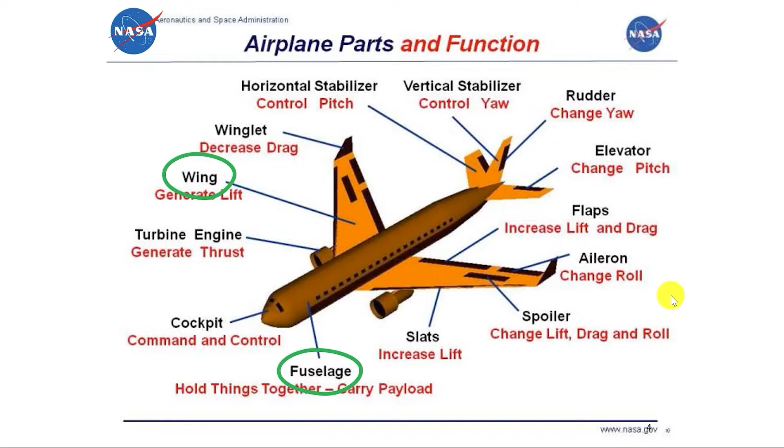Okay, so wings are basically designed in different shapes and forms. Today, we're going to be only concentrating on one form of them, which is the rectangular wing. I'll go and show you a schematic very soon. But from every other part that the aircraft has, today we're going to be only concentrating on the wing, which is going to be attached to the fuselage, where it's carrying passengers, payload, even sometimes fuel or cargo. So that's what we're going to be concentrating on.

There are different phases of flight that an aircraft or airplane is going to go through. Let's consider a commercial aircraft. It goes through taxiing, then takeoff, cruise, descent, and then landing. So for long-haul airplanes, the main phase is going to be the cruise phase. This is where they're going to be climbing to a certain altitude, keeping that altitude, and cruising to the destination. So for an airplane to be able to move from point A to B at a certain altitude, all the forces have to be in balance, like what we're showing here.

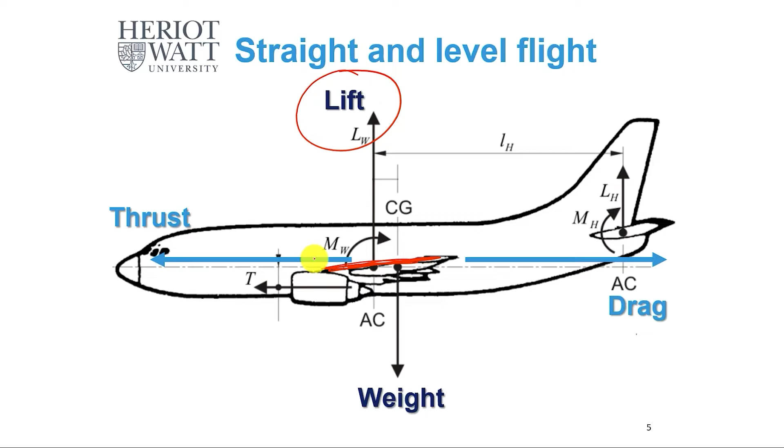So, as I said, there are different shapes of wings that we can generate lift with, but the main lift, as I'm highlighting here, is actually generated from the wing. With the latest technologies, however, in some of the recent aircraft, the fuselage is also contributing to the lift generation. But the majority of the lift that's going to be generated is from the wings themselves. Okay, so we are only going to be concentrating on wings today.

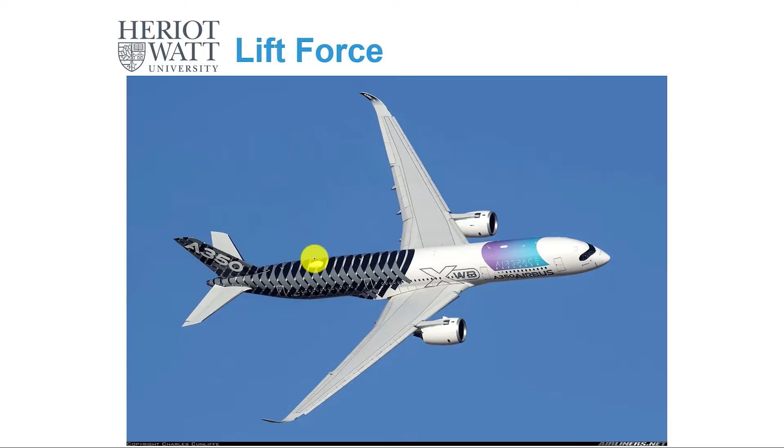So look at this Airbus A350. This was taken with a friend at the recent Dubai Air Show, so it's actually banking. What we want to do quickly in this slide is to understand what lift force generation is going to be dependent on. So depending on where your airplane is flying, whether it's sea level or a certain altitude, 30,000 feet, for example, the pressure, temperature, and more importantly, density of the air varies.

So as the altitude changes, lift force is going to be varying as well, because the amount of air molecules in the air is going to be different. So at higher altitude, less air we have, so less interaction between the molecules and the surface.

Okay, so this is definitely going to be affecting. The other thing which is affecting the lift is the wing area. So we're talking about aerodynamics. It's the interaction between the flow and the solid surface, in this case the wing. So the larger the area, the more interaction we're going to have. And if the shape is right, you're going to be generating more lift. So the larger wing area of your airplane is going to be giving us more lift. So lift is proportional to this area.

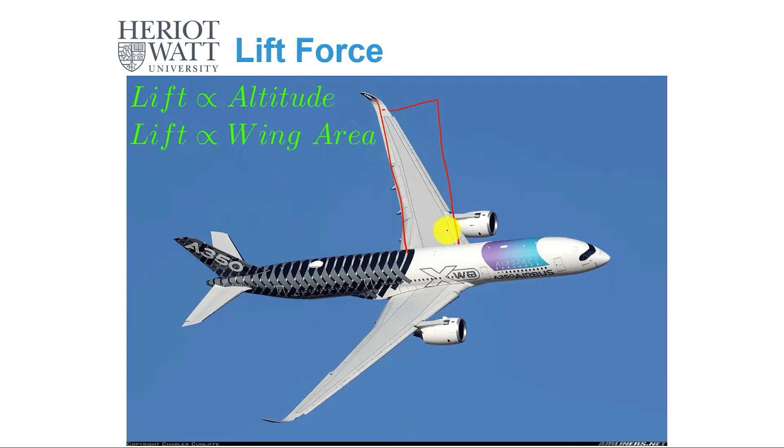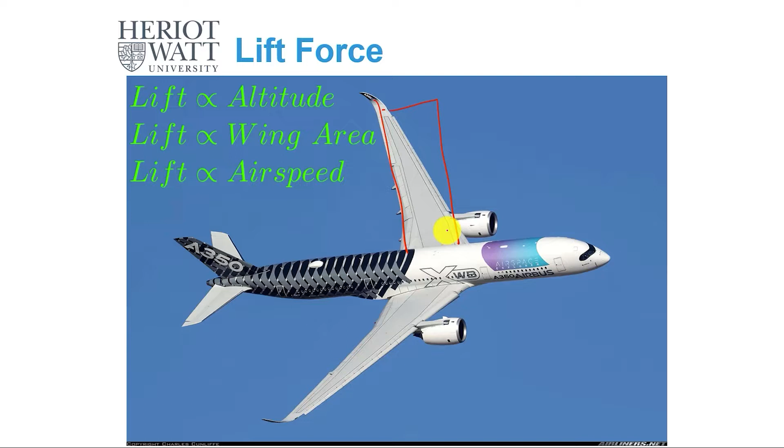The other parameter is airspeed. So the lift force is also proportional to airspeed. Okay, it's not linear, but it's proportional to the airspeed. So the faster the speed, the more lift is going to be generated. The last but not least is the actual characteristic of the wing itself, and that's what we're going to be concentrating on. Okay, so the characteristics of the wing, which are basically the profiles of the wing, like the one that you can see here, are basically determining how much lift is going to be produced. Okay.

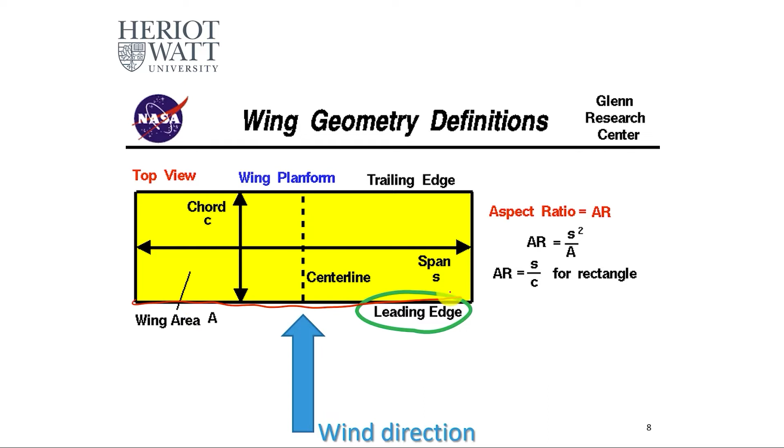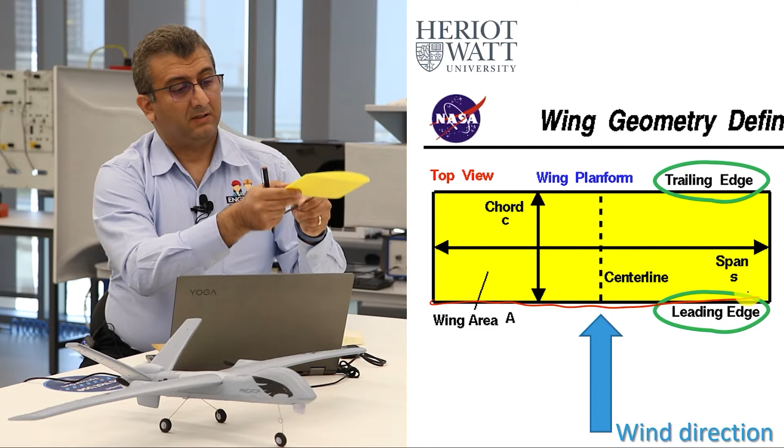So, as I said, today we are looking at a rectangular wing. Looking at this image, if the wind direction is going to be from the bottom to the top of the slide, this line here is going to be called the leading edge. This is basically the part that first sees the flow, and then we're going to have the aft part, which is called the trailing edge, and that's where the airfoil finishes. The distance between the leading edge and trailing edge

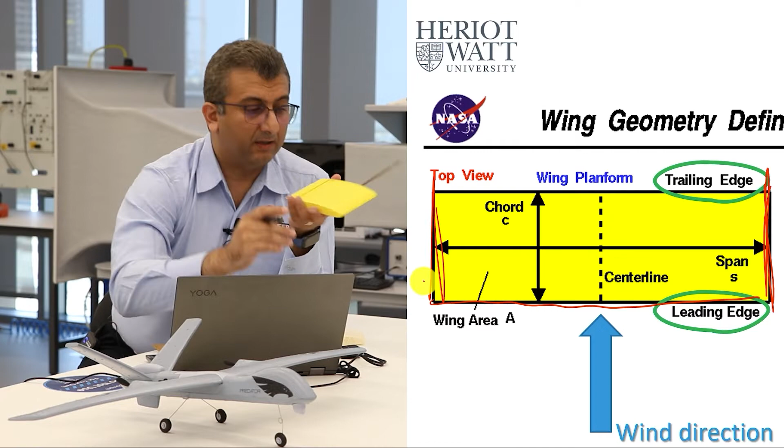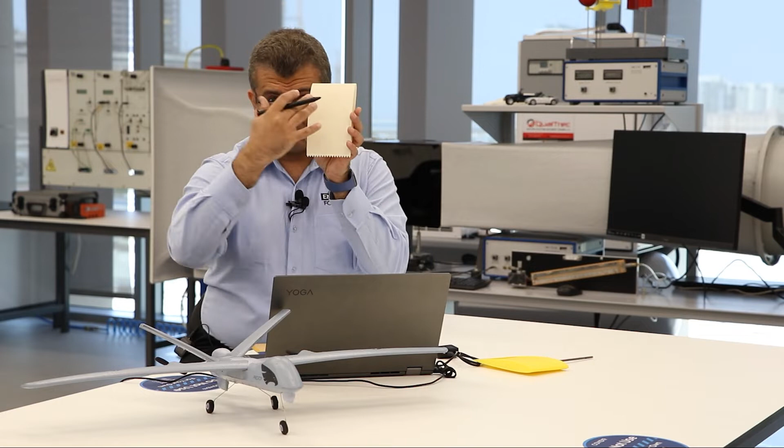is called chord. And the distance between the two sides, like what we have here, or these two sides, is called span. Like the aircraft model we have, it can have a long span, or like the airfoil we have, which has just been designed for testing, you're going to have a shorter span. So span can vary. Okay, and obviously this section is going to be the wing area. So if you look from the top, this is exactly the direction that you're looking at through the camera. This is going to be the wing area. That's going to be very important for us, as we said. Okay, so

in theory, and in fact that was the type of airfoil that a very long time ago was first produced, if you're going to have an airfoil, which is basically a cross section of the wing, so if I cut the wing at a certain point, the shape that you'll see from this side is called an airfoil. It's a teardrop sort of geometry. Then if the center line, which is basically running through here, divides your airfoil into two equal parts of upper and lower section, this airfoil is going to be called a symmetric airfoil.

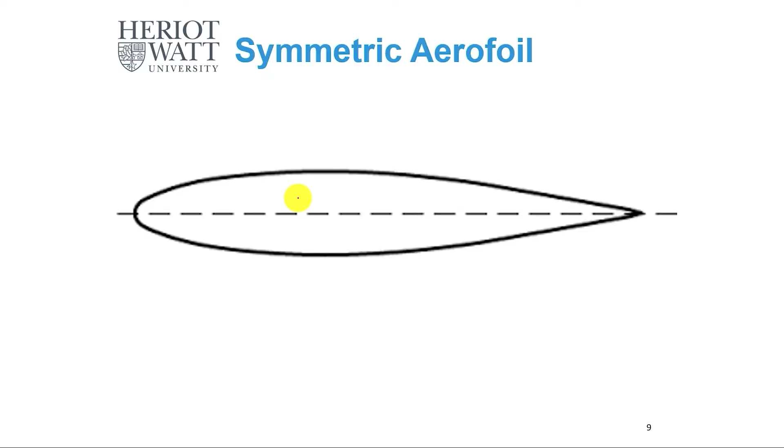With a symmetric airfoil, if you place it into the air, either move the airfoil or run the flow over it, since there's symmetry with respect to the horizontal axis, the force that's going to be generated at the top is going to be equal to what's at the bottom if you're holding your airfoil horizontally. It means there's not going to be any angle between the line connecting your leading edge to the trailing edge, which is your chord, like what I'm showing in this slide here. And hence, these two forces are balancing each other, so no lift is going to be produced.

So what do we do to generate lift for symmetric airfoils? We change the angle. So we change the angle of the chord with respect to the horizon, or with respect to where the flow is coming from. And that angle is called angle of attack, where the higher the angle, the more lift is going to be generated from the top. It's because the projected area of the upper surface is going to be longer than the lower. Flow travels faster at the top, hence the pressure gets smaller. With less pressure on the top than the lower, there's going to be an upward lift generated. Okay, so with the symmetric airfoil, the only way we can generate lift is by adjusting or changing the angle.

So look at this slide. Top left shows a numerical simulation where the lift is generated. The bottom right is actually a graph which soon you're going to be generating as well. It's the lift force as a function of the angle of attack.

So the higher the angle of attack, more lift is going to be generated, but the flow around the airfoil is going to be becoming more complex, and you're going to start seeing separation of the flow. You're going to see turbulences, eddies, vortices, all of this sort of messy flows like what you see in blue regions in this simulation,

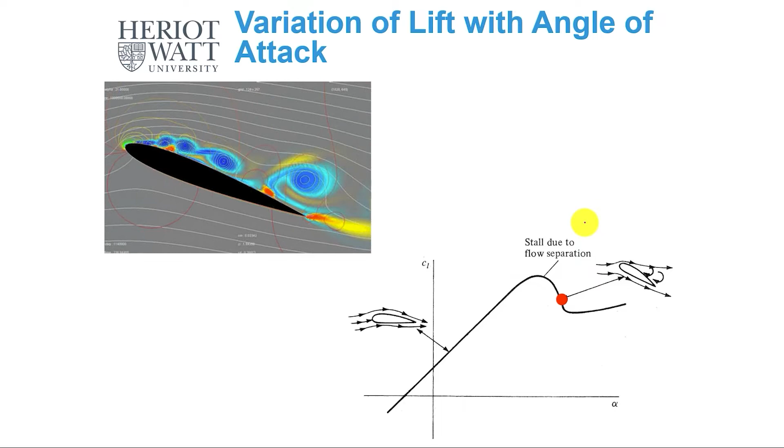that will at some point stop increasing the lift. So from that point onwards, no matter how much more you increase the angle, since there's not going to be any flow attached to the surface, it's going to be separated. This upward lift is not going to be sufficient. The weight will dominate and your aircraft will sink, basically. So this phenomenon is called stall. And you would see in this graph the peak is where the stall is actually happening and the separation is going on.

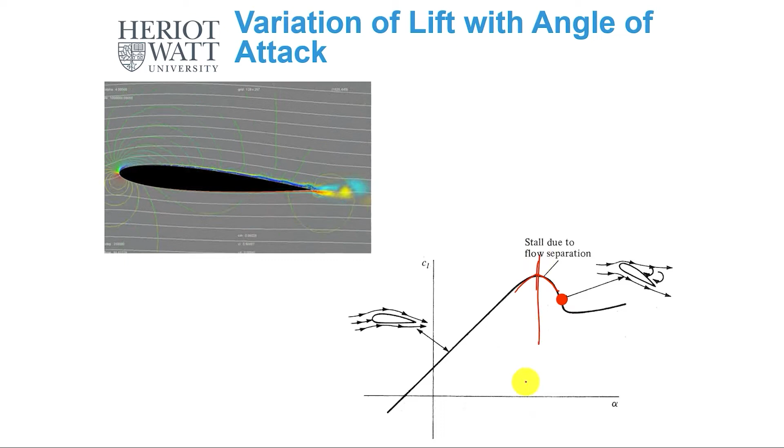So the question would be, what are the other ways that we can generate lift? One of the common ways is to adjust the geometry of the wing itself. So we create the curvature that, by adjusting the angle, we give ourselves. So looking at these graphs, what basically we're saying is we bring asymmetry into our geometry. So basically we'll curve the chord line, if you like. So we change the balance of the area between the upper and lower section when the chord runs through the leading edge and the trailing edge.

So the asymmetry and the curve is called camber. Okay, this is called camber, and obviously you can have different curvatures to be able to generate different lifts. So one of the main parameters in airfoil design or wing design is to adjust the camber, and that's what we're going to be actually doing today. Today one of the tasks we're going to be following is adjusting the camber to be able to produce the amount of lift that's required to hold an airplane in the air, basically.

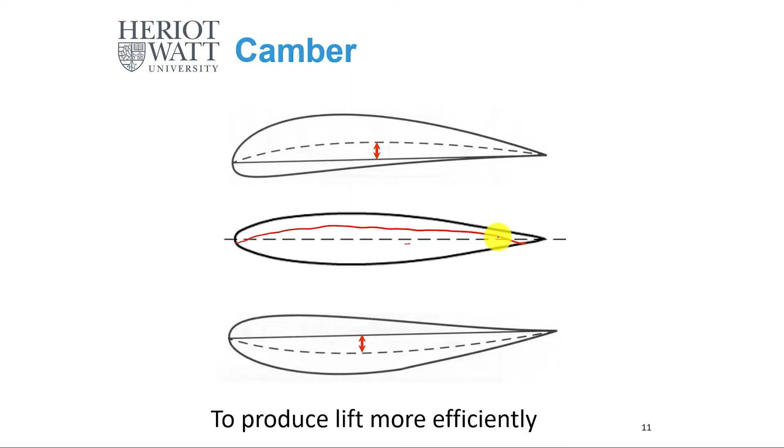Okay, so the other terminology that we are going to be using is the thickness. We talked about camber; this is going to be called thickness. So the distance between the upper and lower surfaces is called thickness of the airfoil. And obviously it varies, but there's going to be a point where you get a maximum for the thickness, and that's normally what we define, and that's a percentage of the chord. So if the chord is from 0 to 1, depending on the design of the airfoil, we can say the maximum thickness is going to be, let's say, 25% or 0.25 of the chord, for example. Okay.

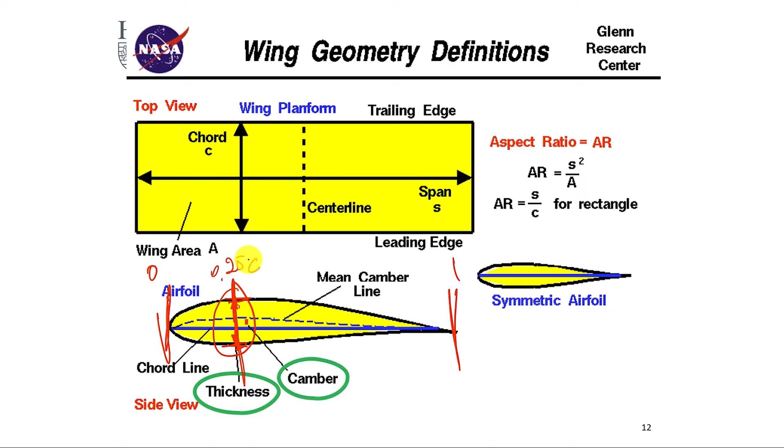So just to summarize the terminologies that we have learned: the lift force, which is generated by the wings; the span, the distance between the wingtips; chord, the distance between the leading edge and the trailing edge. The airfoil, which is basically the cut two-dimensional section of your wing. And in real wings, the actual profile can vary, and this is basically the secret of the companies. And then we talked about the camber, the asymmetry between the upper and lower surfaces, and the thickness, which is the distance between the upper and the lower surface at a certain location along the chord of the airfoil.

Now let's look at the tool. It's been designed by NASA. It's called FoilSim. It's a simulation tool, and it's used only for educational purposes. We can't use it for any real projects. So please note that, and that's actually been made clear by NASA themselves as well. But it's a very powerful tool, easy to use, to be able to demonstrate everything we just said. So,

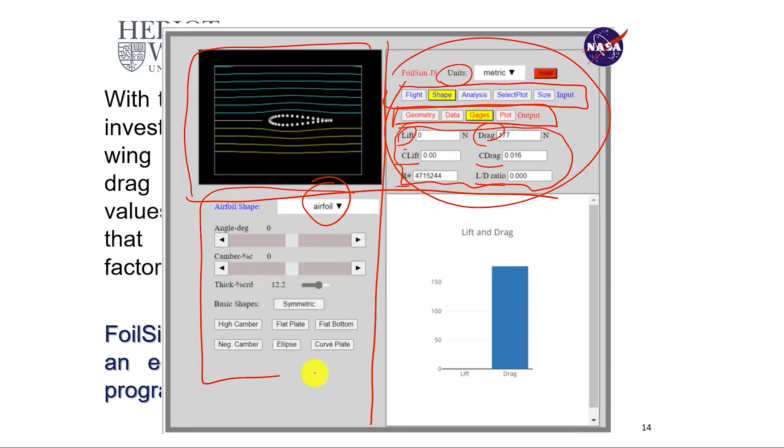The bottom left still has some extra adjusting tools, adjusting variable tools that we can use. And the bottom right is going to be the graphs that the tool is providing us.

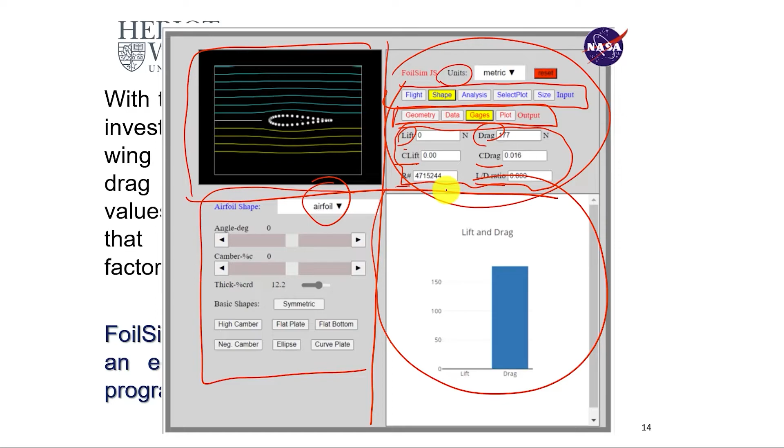So just to get a bit of feeling of how the tool works, I thought it would be useful if we can have a practice example, and we are then going to be able to understand how we apply the knowledge or the values that we have into the tool. Here is the question.

We have an airplane flying at 45,000 Newton weight. Remember straight and level flight: for us to be able to fly an airplane at a certain altitude, the lift and the weight must be the same. So when it says there's a weight, using W for weight, is such and such Newton, it's a force. It means the lift that the wing has to generate should be the same as that to be able to fly straight, as we mentioned earlier.

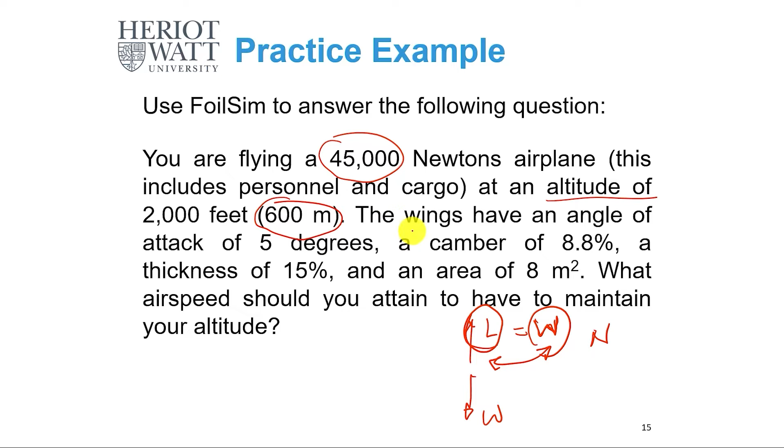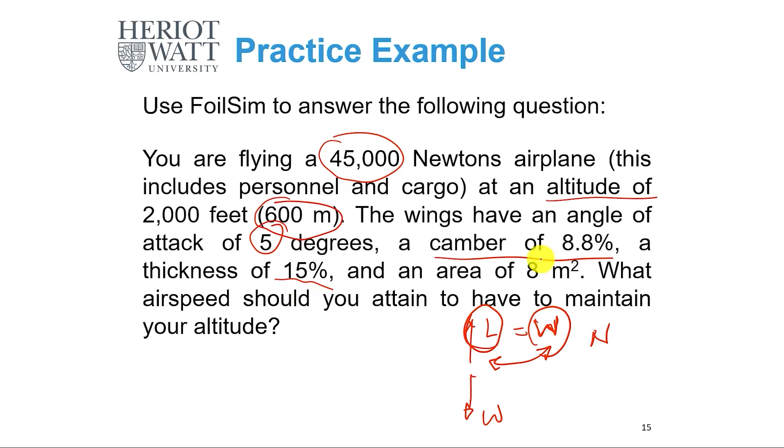We want the airplane to fly at an altitude of 2,000 feet, which is equivalent to 600 meters. We know that the wing is at 5 degrees angle, so it's not horizontal, there's a 5-degree pitch angle. For this particular airfoil, the camber is 8.8%, that's where the maximum camber is in percentage of the chord, and the thickness is 15% as well, so the maximum thickness is occurring at 15%, and the area is 8 meters square.

The question is, what airspeed should this aircraft fly at to be able to meet these conditions? So the airspeed is the variable parameter for us.

So let's then move to our browser where we have the tool. The first thing we do, let's reset to make sure that we're starting fresh. As I mentioned, the units, I'll change it to metric.

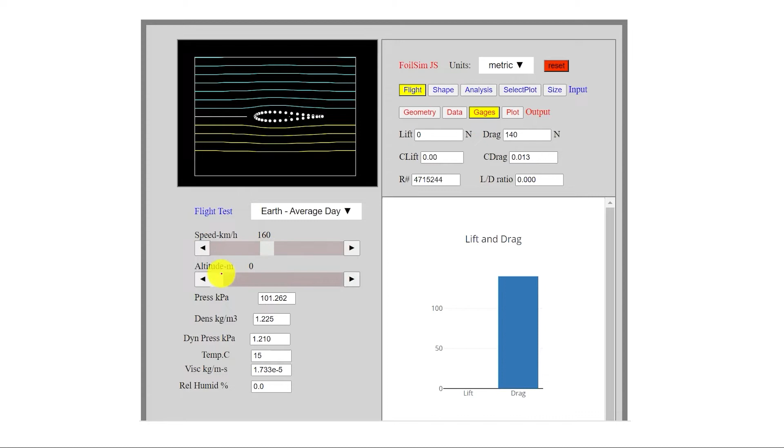We start from the left for the inputs. The tool allows you to choose different locations like Earth, Mars, even changing the air into water, and even Venus, for example. So we obviously are using Earth. The airspeed is the one that we're going to be varying. Altitude, we already set 600 meters, okay so I'll choose that. You just need to move the slider. There's nothing else we can choose here, or we can vary.

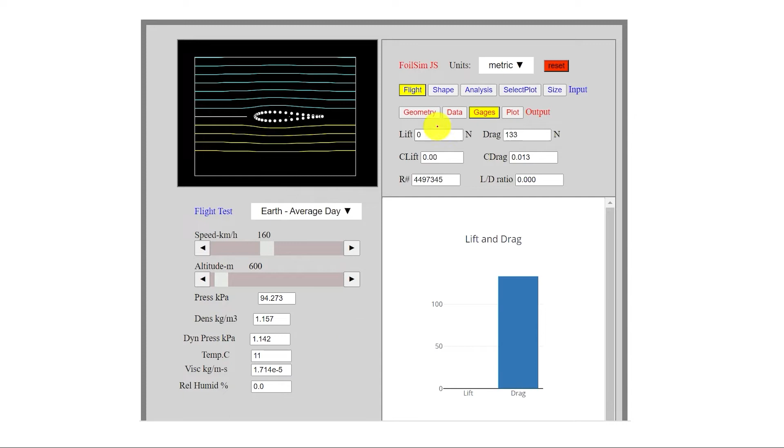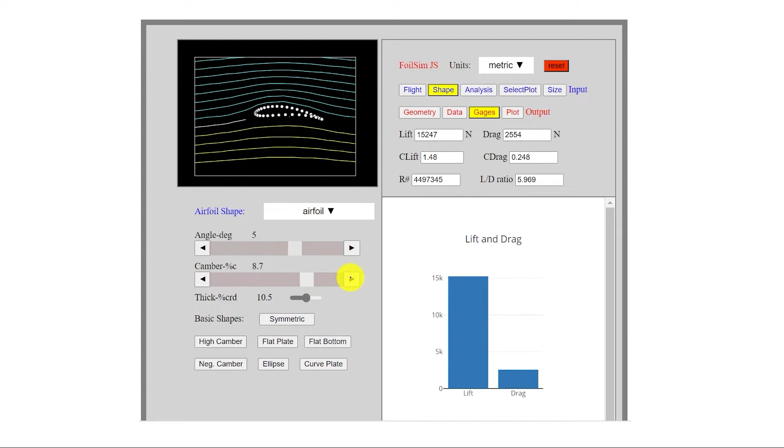The shape is already airfoil, so we don't have to change it. The angle, we set 5 degrees, so I'll drag it until I get 5. Camber was 8.8, and the thickness was 15%, so we're going to have a thickness at 15%. There are some built-in options, so if you want the symmetric airfoil to start with, high camber, etc., you can also choose them if you wish.

So you can see by adjusting these angles, the values of lift and drag are changing, and we do get them in the graph, and this is actually force, so they're in Newton.

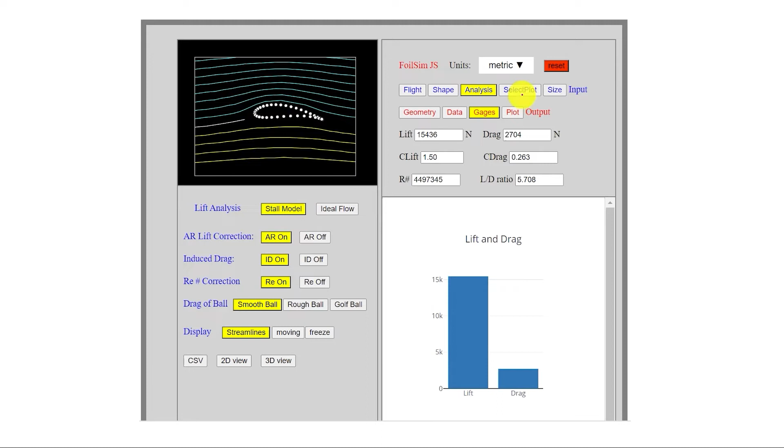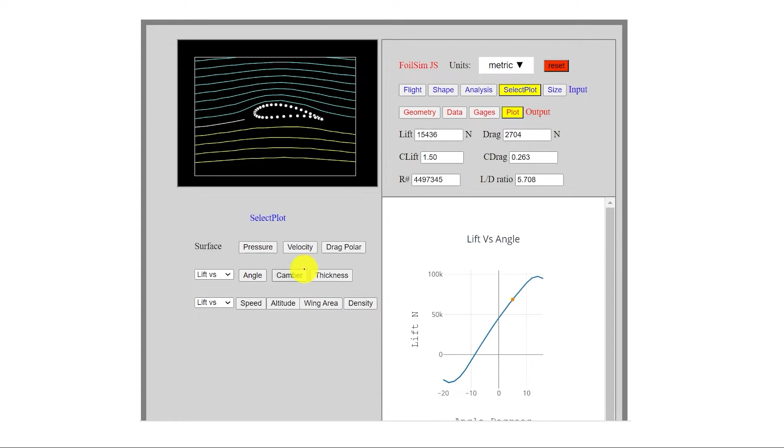In the analysis, there are certain settings that you can change. We're not going to be really talking much about them today in this episode, but you can make some adjustments for some of the parameters. You can choose the plots that you want to actually show. You can have lift versus angle, as I was just telling you, or you can have pressure, velocity, any other combination, which I'm sure you can explore yourself.

The last input option is the size, that's where we have the lift. This is where we have the chord and span adjusted. So for us to be able to get an area of 8 meters square...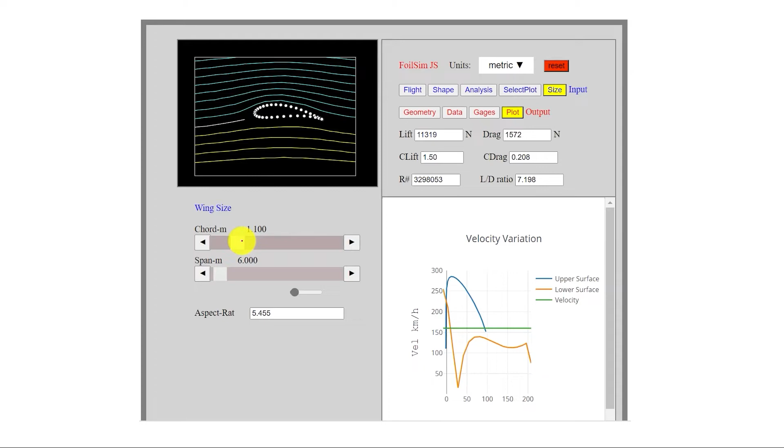If the wing wants to be rectangle, we're going to have multiple options, right? So you can have a wing which is going to have a span of 8 meters by 1 meter chord, for example, or you can have 4 meters by 2 meters. This is where your understanding of different types of airplanes and your design comes into play.

Longer wings are designed for long endurance flights, for example. Shorter wings are designed for certain missions. So you need to do a bit of research here to understand what wing you want. If your aircraft has to stay longer in the air, you need to have more span. You can adjust the chord here, and you can adjust the span.

I choose the span as the minimum, 5, and if I choose a chord of 1.6, you will see I'll get an area of 8. So that's what it gives me. Now if you look at the lift, we're expected to get 45,000 Newton, but we're not getting it at all.

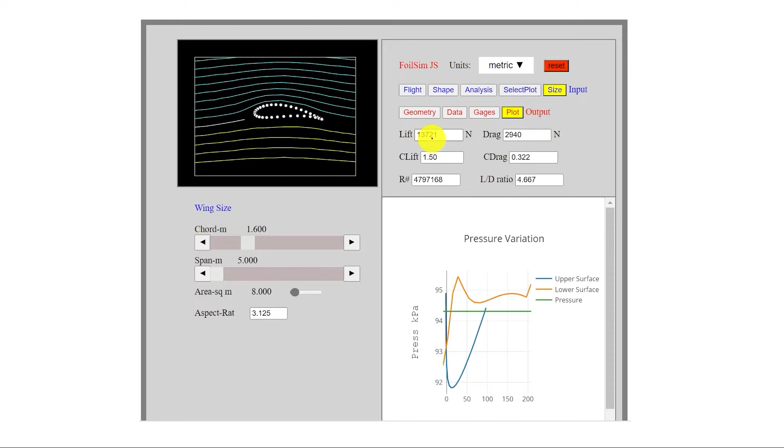So if you go to the flight section, you realize that the speed is what we didn't change yet. If your airplane with the current situation is going to be flying at 160 kilometers per hour, it cannot sustain these conditions and it cannot hold 45,000 Newton, and it will sink basically, or descend. So how would it compensate and generate more lift? By traveling faster. So your aircraft has to travel faster.

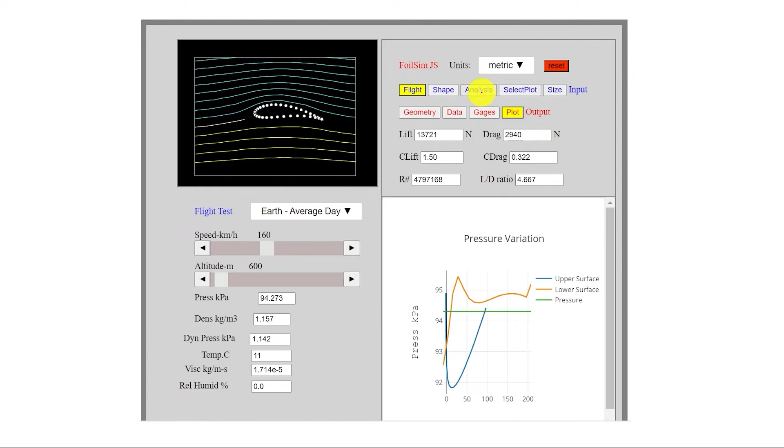How fast is the question, and this tool allows us to actually find that. So I'll switch to the gauge, and this is the output. If I change it to the gauge, it will show me the lift and drag bar charts. So I'll just start dragging to the right. You can see my lift starts increasing.

All I need to do is get to the point where I'm getting approximately 45,000, right? So you can see around 290 kilometers per hour is going to be the required airspeed that the airplane should be flying at. Otherwise, they wouldn't be able to sustain the weight at that certain altitude. It will sink. So for us to be able to generate certain lift, your aircraft has to fly at a certain airspeed. This is with the assumption that the wing has already been designed.

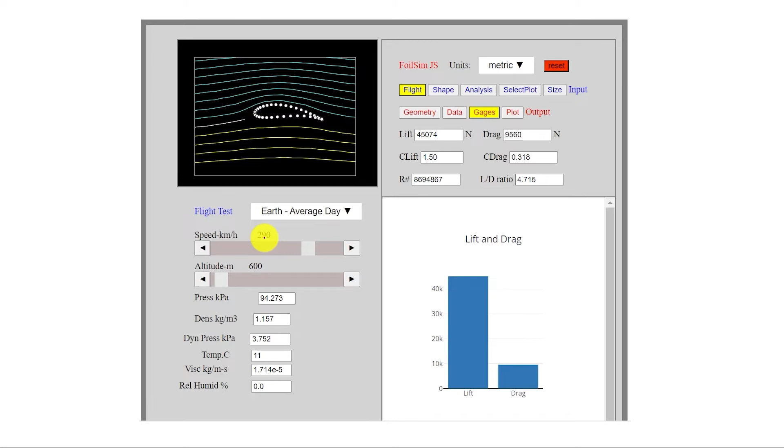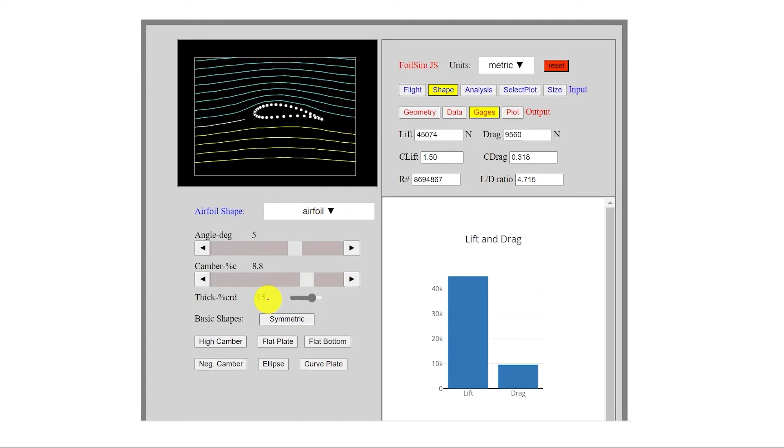So if you look at the shape, we already know what angle we're flying at, we know what camber we're flying at, and we know what thickness the airfoil has. Now that you have learned how to use the tool, you can work with it in different scenarios. So, for example, one is choosing a symmetric airfoil, setting certain parameters: airspeed, altitude, angle. Even you can identify a thickness for your airfoil.

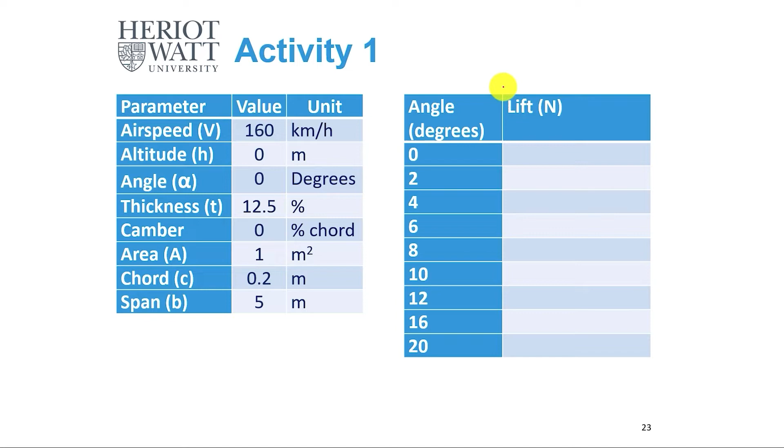Since it's going to be symmetric, I'll start with an easy one. Camber is going to be 0, so it means there's no asymmetry. And you can decide on the area yourself as well, you can say 1 meter square, 2 meters square. And then what you can do, you can start from 0 angle.

This is where you're expecting for a symmetric airfoil to get 0 lift, to see actually the tool is giving you that. And then start increasing, let's say with the increment of 2 degrees, note down the lift, another 2 to 4, 6, 8, 10, and so on. So you can actually see how the lift force generation is happening.

And once you have this, maybe let's say up to 20 degrees, you can then use any software like Excel or any other software that you use, so that you can plot the graph. You can explore the relationship between the lift force and the angle. And this is something that you can actually do.

The other thing you can work on is, let's say you choose an aircraft, Boeing 737, for example. You would know the maximum lift, or you would know what lift, for example, you want to produce. And you can suggest a scenario, like, for example, you're going to have a sea level takeoff, for example, at Dubai airport.

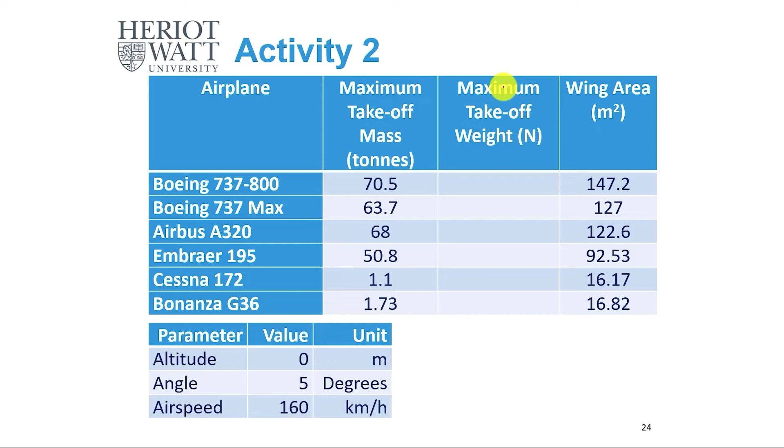The pitch angle, 5-10 degrees, you can choose at certain airspeed, right? Then the question would be, for us to be able to generate the lift required to lift off the aircraft, let's say a Boeing 737 for example, or at cruise altitude, the lift required to hold the aircraft at that altitude. The question would be, what is the airfoil required to generate that? So when we say the airfoil, the chord is unknown, the span is unknown, the camber is unknown, and also the thickness is unknown. So what you can then do is play with these to meet certain design criteria. Like, for example, you can say, I know what the current Boeing 737 wing area is, so you can start with that, say it's around 147 meters square.

What chord and span do I require to have that area? So you can substitute it, plug it into the tool, and then play around with the design of your airfoil itself. You can vary the camber, change the thickness, and see whether you're able to generate the amount of lift that you require, or not.

Sometimes with the tool you may not, because those aircraft are flying at very high altitude, high speed. So you can choose smaller aircraft like propeller ones, general aviation Cessna 172 or Bonanza, the G36 for example. You can choose them, adjust the chord and span to get the area, and then get the camber and thickness to find what airfoil is going to be suitable to generate that lift.

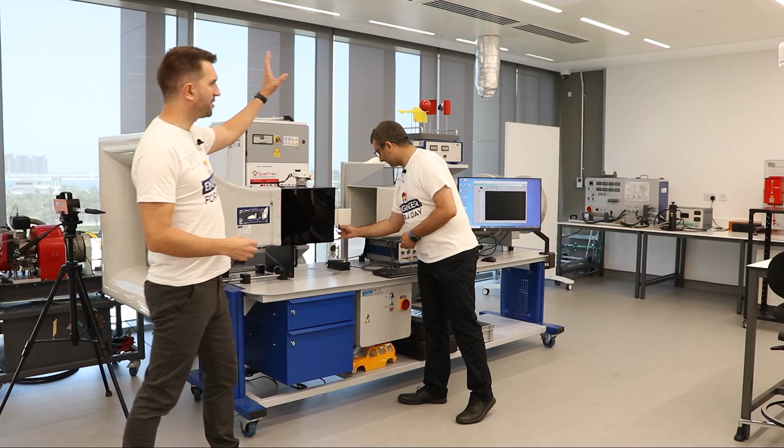Yes, this is the profile of an airfoil which has been 3D printed, and it's going to be mounted on the wind tunnel that we have here. So in a wind tunnel, there's a big fan at the far end on Mehdi's side, and it's going to drag air from my side here and concentrate it. There's a bit of honeycomb in there, we call that flow conditioning, to make sure the flow goes nice and straight through this profile here.

And then by mounting it on this load cell, we're able to measure different forces acting on the airfoil. In this case, we're looking at drag force, which is a resistant force, so that's how much force the fluid is exerting on the airfoil in that direction. And then there's lift, which is perpendicular to it, and that's what is used to hold the airplane in the air.

So a non-traditional orientation, you might say here. Normally your airfoil is going to be in that direction. Yeah, but just because of the way our load cell is set up, we're mounting it in this orientation. Exactly, so we could say the force in this direction is our drag, but the force in this direction, kind of away from the screen, is our lift. Exactly. Excellent, so let's do the experiment. Okay, just closing the test section now.

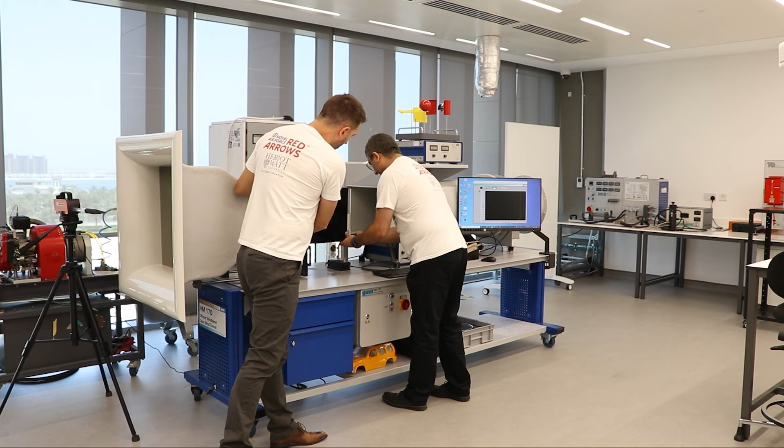And what we're going to do now is set a single velocity, a constant wind flow rate through the wind tunnel. It'll make a bit of noise. Tell me then what measurements you're going to take before we create the noise.

The load cell is connected to your PC, and this software shows the measurement on the vertical axis as the lift force we just discussed. The load cell also lets us vary the orientation angle, or angle of attack, of the airfoil. The horizontal axis shows that angle, so when we change the orientation, it's recorded in the system and shown here.

So you're going to do that experiment for us: progressively increase the angle of attack for a fixed velocity and measure how the lift force changes as you go. Exactly.

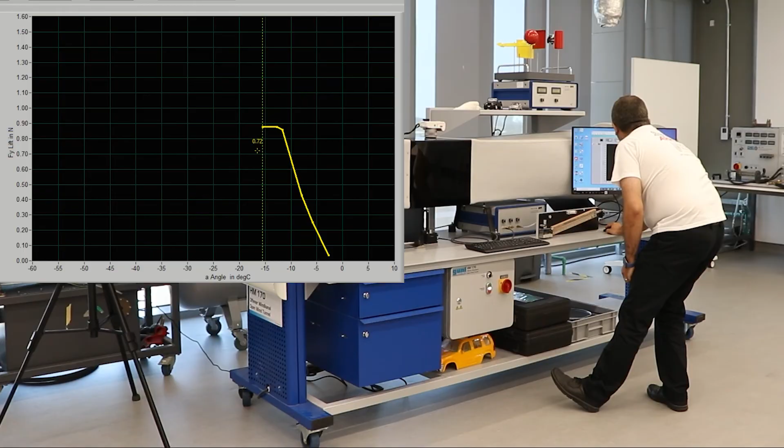Interesting results here, Mehdi. Just to reiterate, on your y-axis you have the magnitude of the force, the amount of lift from the aerodynamics of the airfoil, and this is varying against different degrees of angle - our pitch or angle of attack, the orientation of the aerofoil.

Now, I would have expected that as the angle increased, so too did the force. And it does, right? At the beginning it increases as the angle changes from zero. Yeah, what's happening here is it totally dropped off.

What's gone wrong? So what has happened here is the flow is attached to the surface and generating the lift, behaving itself in theory - going nice and smoothly over the surface and faithfully following the geometry. And as you increase the angle, the flow accelerates further, the pressure drops more, and you get more lift. So that makes sense.

So there will be a point where the flow cannot sustain this situation, where it cannot stay attached to the surface. It will start separating from the surface, and that's where you start seeing this drop. And we call this stall, don't we? Exactly, this is a stall condition.

So we've gone so extreme in our angle that the flow doesn't faithfully follow the surface anymore, and you get this stall. Now, that to me is the difference between the quantitative measure - the actual values of force on your screen there - but sometimes we don't fully understand what's going on, and there are more qualitative measures we can use, like flow visualization.

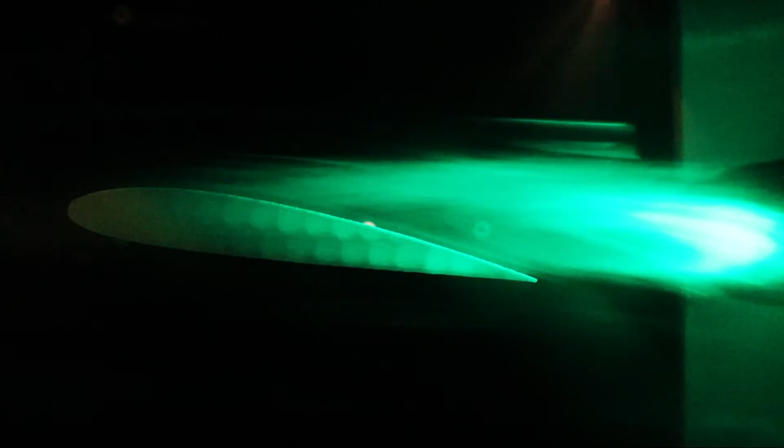And as soon as you get close to this stall point, you start seeing less concentration of the particles or smoke close to the surface, and you see more of a shadow. So that means the flow is not attached to the surface, and the concentration is moving away from the system. That's kind of where theory breaks down in a way, right?

Exactly, because those equations we use in our simulations, those equations we use to design the fundamental geometries, no longer apply in that scenario. It will apply up to the point where you don't have separation - after that, you can't apply the same theory.

And this is one of the huge values of being an engineer - we need to be able to apply theory, but also understand when theory applies and when it is less simple, and design around those scenarios. There are lots of different added extra geometries you can put on to avoid these conditions of stall, but fundamentally, it all goes into what can be a complicated three-dimensional design.

I hope you have managed to get some insights into some of the challenges and opportunities that aeronautical engineers have, and what role they have to play in the future development of what is a very, very exciting industry. Exactly.